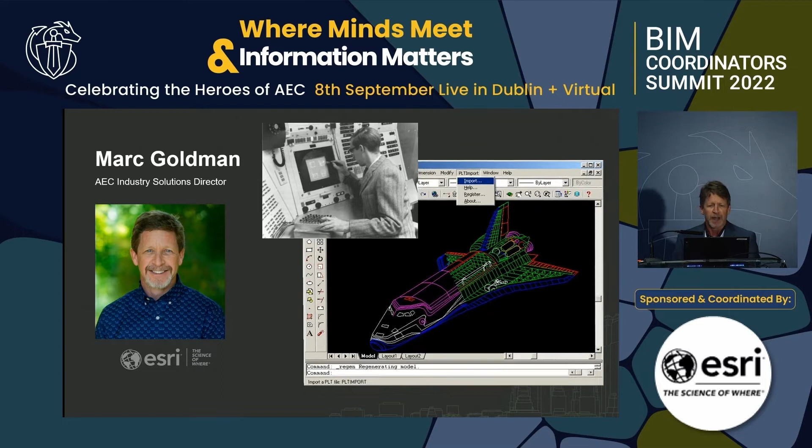Over the last couple of decades, 3 decades, I've been involved with the construction technology industry. Worked at Autodesk twice. My first tour of duty was back in the late 90s, early 2000s, working on some of the earliest versions of AutoCAD, 3D Studio, Animator Pro, various other applications. Over the years, I went back to Autodesk and worked on some of the early versions of Revit once Autodesk acquired it, integrating it with other applications, sort of the early days of BIM.

And these days at Esri, who is the leader in geographic information systems, I'm bringing together GIS and BIM. And I'm absolutely like a kid in a candy store, seeing the capabilities of Esri software combined with the tools and technologies and workflows that I've come to know over the last couple of decades.

So I'm going to assume that maybe half of you might know who Esri is. Like I mentioned, we are the founders of the world of GIS, Geographic Information Systems. Best known as digital mapping, but it's much, much more than that. Our ability to analyze geographic information, bring together architecture, engineering, construction information, the visualization of that data, the analysis of it, the ability to tap into our tools through our APIs, through our SDKs, software development kit. You'll see some of the capabilities expressed through my presentation here.

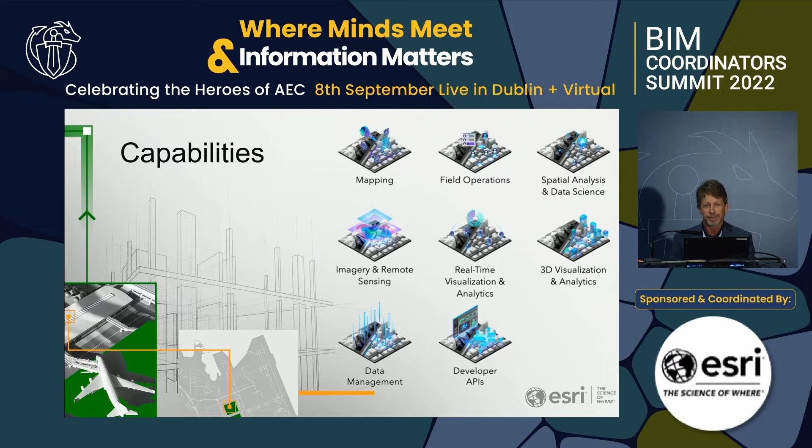I'm going to go over a number of demos, examples, customer case studies very quickly. I have maybe about 10 or 15 little 1-minute videos that I'll talk through once we jump into this. The concept that we talk about at Esri is this idea of a geographic approach, putting location really at the center of your mindset as you're working on infrastructure projects.

The idea of a geographic approach, it's the modeling, it's the, put my glasses on. It's putting together the various layers of information, again, with location being a key element. Let me try this again here.

No, not going to work.

Okay. Using that location data, spatially analyzing it. Data science is around spatial information, allowing you to understand the entire infrastructure cycle, again, with location at the core. Infrastructure management, that's pretty well understood, I would assume, by this audience. It's the entire life cycle. Beginning in planning, going into design, obviously the construction, the delivery of the project itself, but ongoing into operations, asset management, facilities management, is what infrastructure management is.

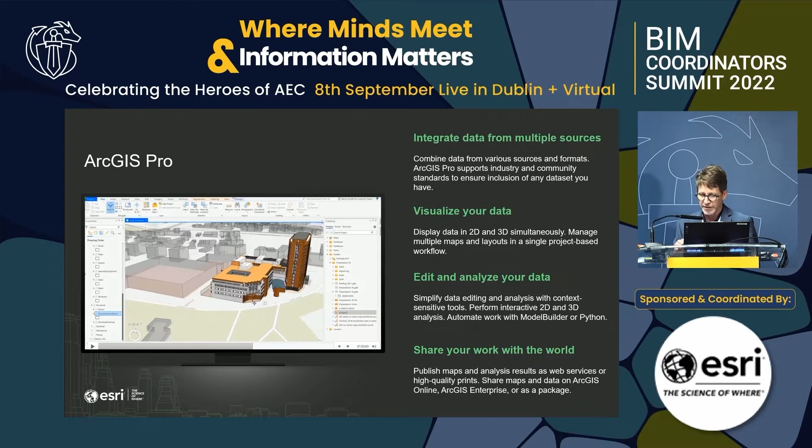There's a product we've come out with recently in collaboration with Autodesk called ArcGIS GeoBIM, which directly connects the Esri cloud and the Autodesk cloud, allowing those collaborative environments: underlaying the maps in your CAD and BIM world, or overlaying your CAD and BIM information into GIS space through a cloud-to-cloud connection.

So let me jump in here a little bit about location, as I mentioned at the start, how important location is in AEC. The projects you work on, the projects you're involved with are spatial, not special. Maybe they are special, but they're spatial. And yet, the majority of AEC tools don't necessarily take into account location and its importance.

I think it's also quite interesting, when you look at the many industries across the world, AEC—architecture, engineering, construction—the work that we do is perhaps the most complex from the perspective of the many types of information that have to be brought together. CAD and BIM information is some of the most complex data that is worked with.

Overlay on top of that point clouds and various other reality captures. Bring into that information about your context, your traffic flows, your weather patterns, your loads of people coming in and out of buildings, spreadsheets, Word docs, PDF files, all being brought together and needing to be analyzed. I really don't think there's an industry as complex as ours as it pertains to all the types of information that have to be brought together.

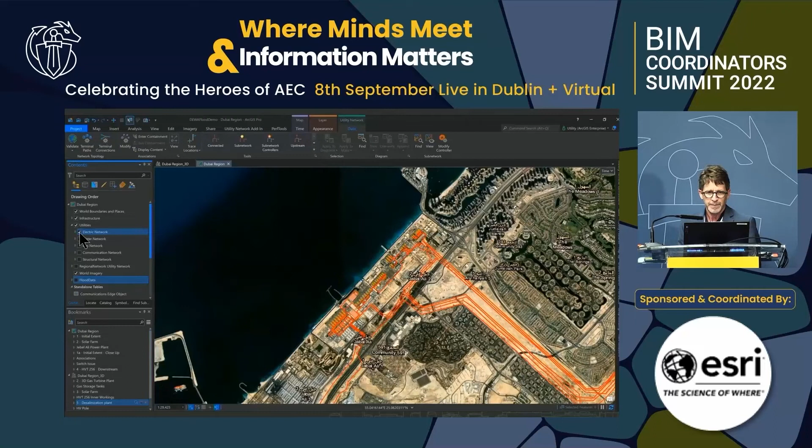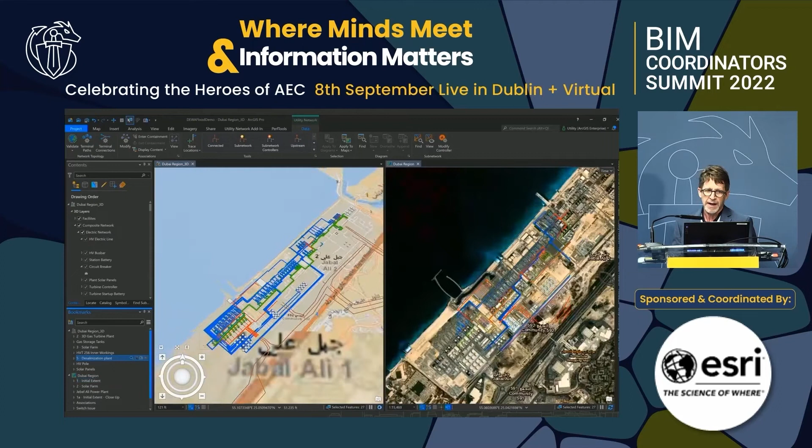Another project here with an environmental component is in Dubai, a solar farm that is feeding and is the energy supply for a desalination plant. So a combination of 2D and 3D, typical maps as you'd expect from a company like Esri, but BIM-like views as well. These model objects are, in this case, visualized and described specifically in Esri.

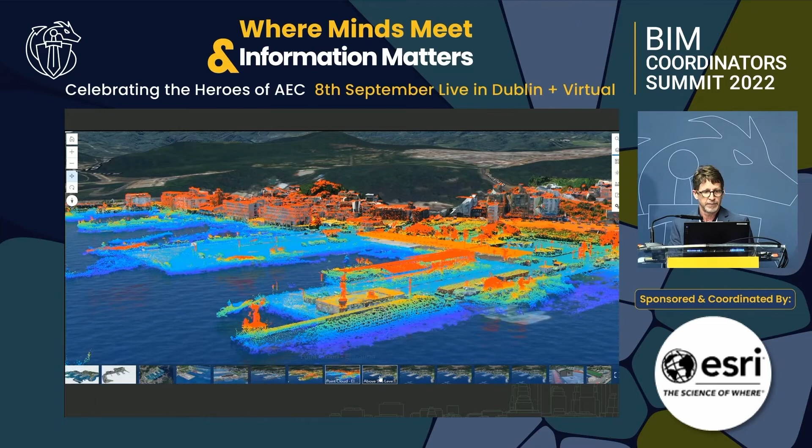Other solutions combine Esri tools, GIS environments, with 3D content that came from Revit. In this case, this was in Taipei, a project where from the US we coordinated the reality capture. Then in Taipei, they used the models and brought in their Revit content overlaid on top of the GIS, visualized with the point clouds, to understand the environmental impact of a new project they were going to build, and whether or not potential ocean rise would affect this new design for a project on one of the ports.

Another area that Esri focuses on around AEC specifically is design and engineering. This is kind of the core, the place where you perhaps first think about AEC work - the heads down, fingers on the keyboard, producing the drawings, producing the models, producing the documents so that our world can be built. GIS serves great value in these workflows, allowing the designers, the engineers, the planners to have context, to understand their environment - not just their building, not just their road, but the environment in which that building or road might exist.

Using GIS in conjunction with BIM in design and engineering delivers better documents, better models, better insights, better processes. So as it pertains to design and engineering, I'd say our tools are used certainly in these workflows, but really across the entire spectrum of design and engineering tasks.

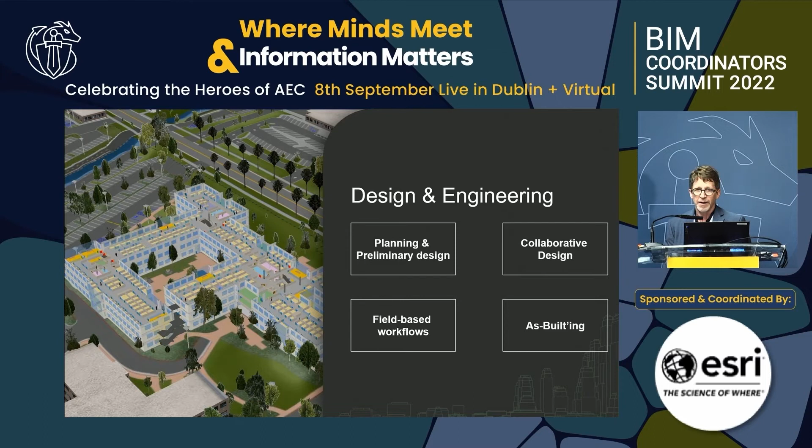I think we're first used in planning and design because, again, that context. One of the scariest things I recall being an architect and engineer professionally is that blank screen - starting out without context, having to put the first line down, whether it's digital or with a pencil. But understanding context, knowing the environment, knowing traffic flows, weather patterns, knowing the environmental conditions of your project certainly helps in those first stages of planning and design.

GIS tools, as you'll see through some of the examples I'll show, are a brilliant solution for collaboration - getting out of your mind's eye what your design concept is and helping your entire team understand what you're working on, being able to collaborate around information is what leads to successful design and engineering projects. Not everyone is going to have a copy of Revit or a BIM tool on their desktop, but they need access to that information. GIS is democratizing that, getting that information into the hands of the entire group of stakeholders who might be involved in projects.

You'll also see through some of these examples how our tools are used in field-based workflows. Design and engineering very often happens at a desk, in an office, or these days perhaps at our kitchen table, but much of the work still happens out in the field. You'll see through our examples here Esri's tools used for form-based work, reality capture, scanning and analysis of point clouds and meshes, and then certainly that all applies to as-built workflows as well.

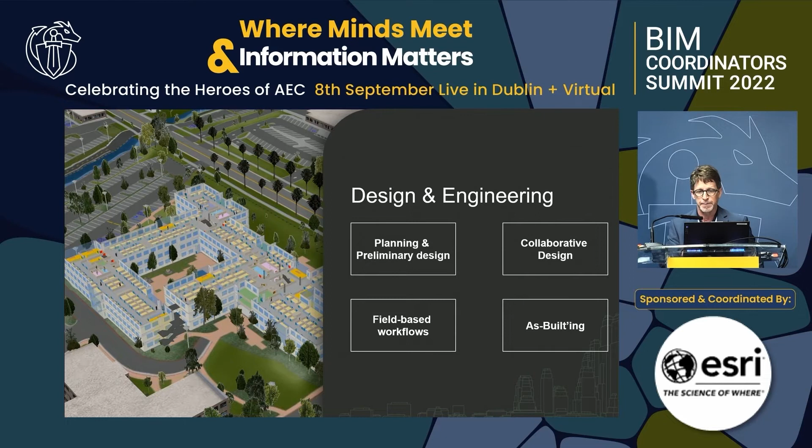This first example here is using a product of Esri's called City Engine, which is a parametric city and building modeler, where all this data is brought from Esri through our SDK into an Unreal environment. So in real time, this level of visualization, models, and interaction - running on, in this case, I believe a desktop application - was used to inform the city planners what their town might look like with a 3-story set of buildings versus a 2-story set of buildings.

Various awning and building front styles versus others. You can see at the bottom there's scenario A versus scenario B. This is a completely data-driven environment, so it isn't like a 3D studio scene or a typical gaming scene, which is static. This is dynamically generated models, and every so often you'll see scenario A versus scenario B happen, where the buildings themselves completely change designs by tapping into the GIS data and parametrically running the scenarios.

This animation, there we go. This is actually downtown Denver. I didn't realize it until it zoomed out. This was an example that one of our solution engineers put together, and you can see a combination of 3D meshes that were generated from flyovers.

You'll see certainly GIS type information helping you understand zoning and routing and usage of various assets within the city. But then also in this environment, we bring in a Revit model, and that Revit model is just imported directly. We have a great relationship and partnership with Autodesk that has allowed us to directly read and write out and integrate with Autodesk solutions, as I mentioned earlier.

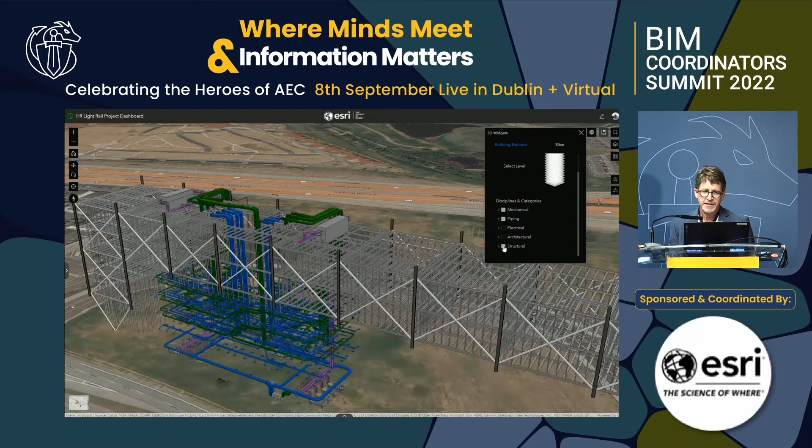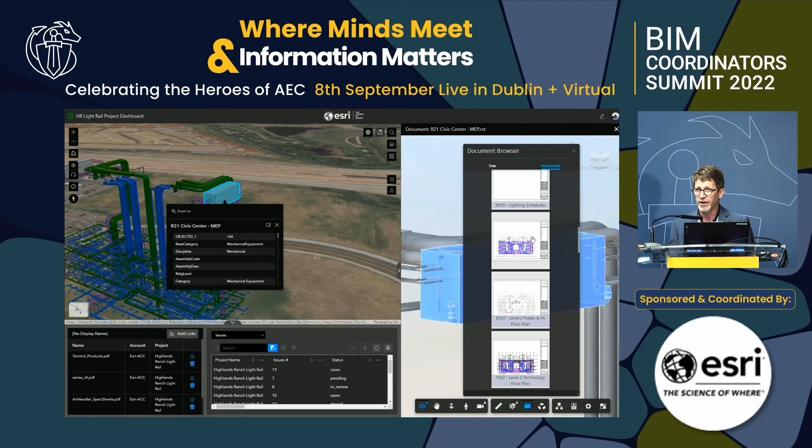This is an example of that Geo BIM product that I mentioned early on, one of our connections with Esri, with Autodesk, where what you're seeing is an Esri environment combined with an Autodesk environment. One single browser tab here running with a map on the left, a 3D map, where we click on an air handling unit on top of the building that connects us to the Autodesk Construction Cloud, which houses all the additional information, all the CAD information, all the details that you probably wouldn't want to keep in a GIS. There's information that you want in GIS, and there's information you want in your CAD and BIM environments.

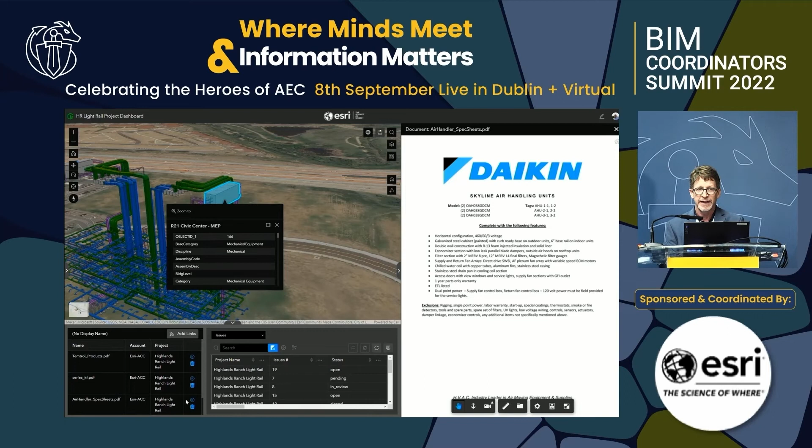The term common data environment has been bounced around a lot lately over the last few years. At Esri, we talk about a connected data environment. We're not under the impression that every bit of information is ever going to be stored in an Esri world, or an Autodesk world, or an SAP world, or a SharePoint world. We exist in a connected data environment. And ArcGIS Geo BIM, what you're seeing on screen, is exactly that - a combination of the GIS world, and in this case, the CAD and BIM world, all the data hosted by Autodesk. This is an interesting project.

This one is in Taiwan, I believe. Hopefully it starts playing. There we go. Here, I believe about 20 kilometers of light rail with various stations, train stations, designed in Revit, brought in to Esri, where we can visualize the context in various types of environments. So a rather simple schematic-like view with the BIM models, highly articulated, zooming around the entire city with tremendous speed.

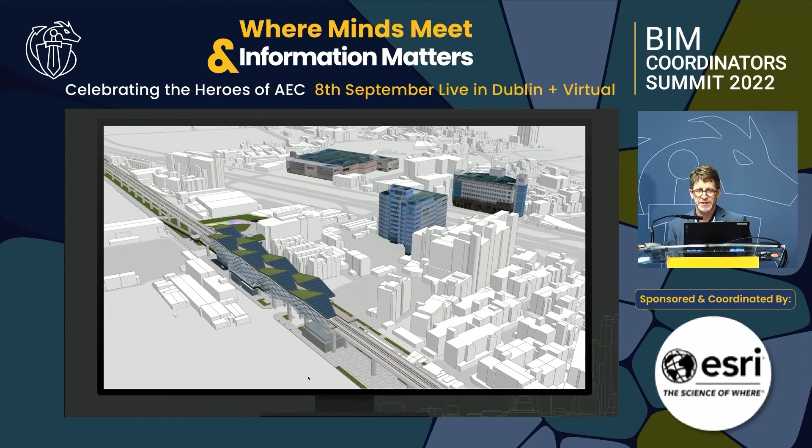This one actually is not sped up. This was a scene that I actually interacted with and just recorded the screen itself. But you can see 3D models that came from BIM environments overlaid on top of data that is essentially OpenStreetMap data, 3D content that's open source, available to be brought into GIS. Where again, we can do sunlight studies, we can do flow analysis, we understand the context much better than we would just in a basic CAD or BIM world.

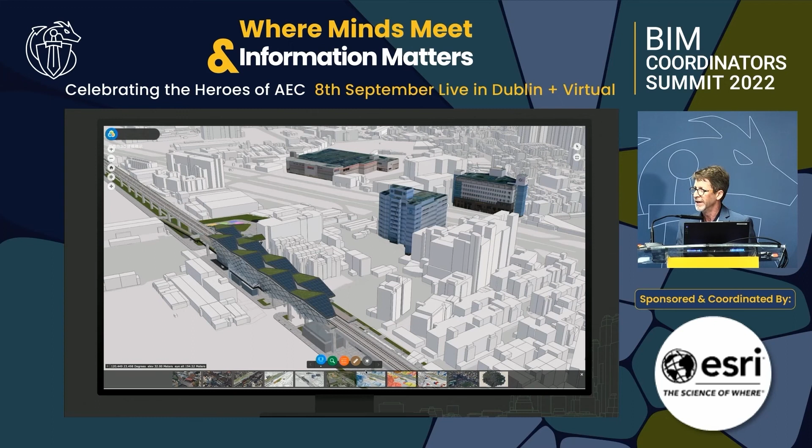And this is an interesting project as well. This is from Egis, the AE firm based out of France. Here in Paris, they did an analysis of their various train stations, their population centers, their population density, to understand where and how they should expand their train stations.

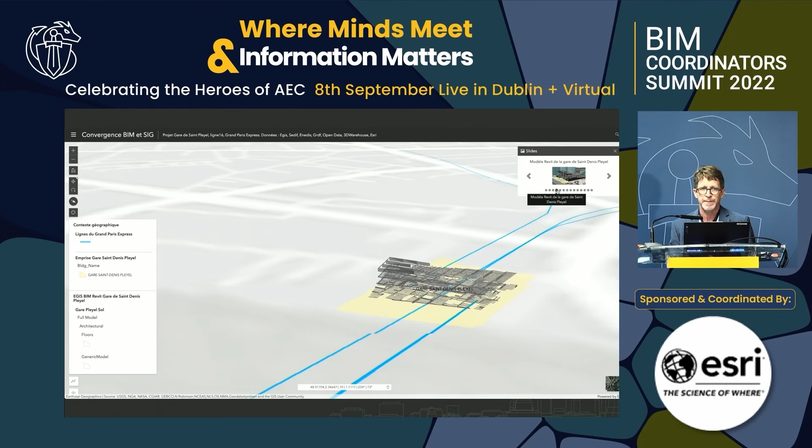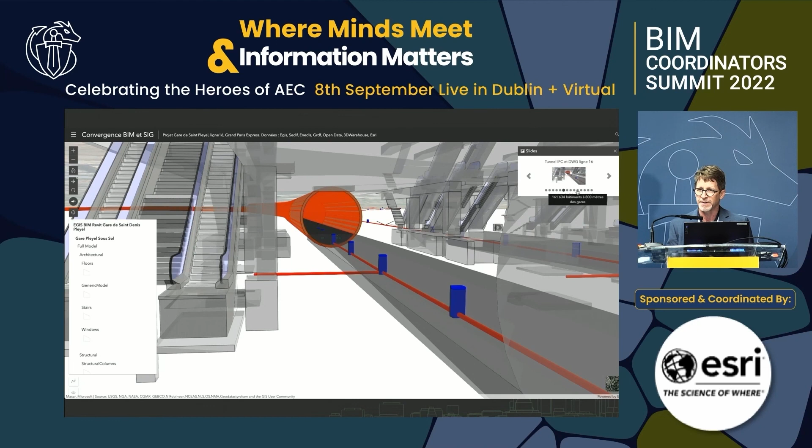So this was a Gare de Saint-Denis Pleyel Revit model, again, brought into a GIS environment where you can understand not just above ground, but underground. Understand the tubes, understand the egress, understand the movement of people and space through the spaces themselves in this GIS environment. Zoom back out, and you can see then what the impact would be of this particular train station on population.

So with that, with a little bit of understanding of who Esri is, what we do, some of our examples, I'm going to hand it over to my friend and longtime colleague, co-worker at one point, I guess, Paul Doherty.